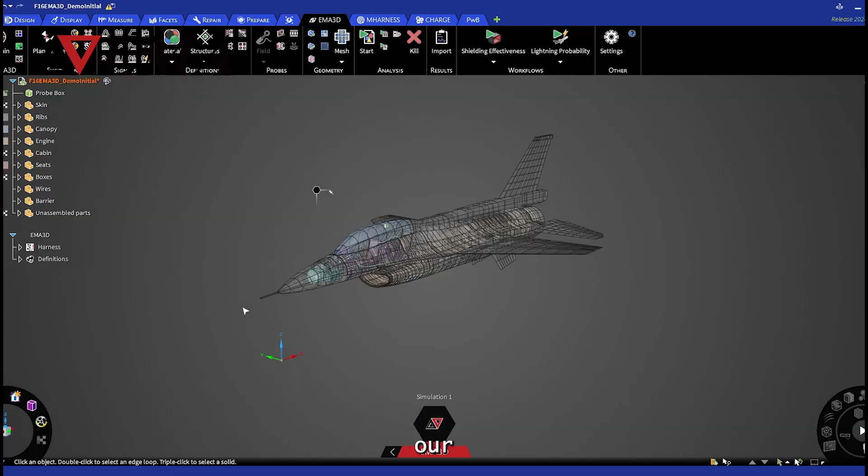People trust EMA to help them get it right the first time because we're really the only company in the industry that blends advanced simulation tools that we develop and use, consulting expertise and measurement expertise. And our brand is that we can come in and we have a wealth of expertise and tools at our disposal to troubleshoot EMI problems, to help you design better.

Where do you shield? How do you bond? How do you design a platform to meet the end use requirements of whatever environment it's going to be in?

Simulation and test have very different value propositions at different parts of the program. Before you build something, you're building CAD, you're doing digital design work anyways, and in lots of other industries and lots of other parts of aerospace and defense, simulation is commonplace. They use it for fluid flow, they use it for structures, for aerodynamics, for strain, and for fatigue. And really, we've been the pioneers of using it for electromagnetic effects.

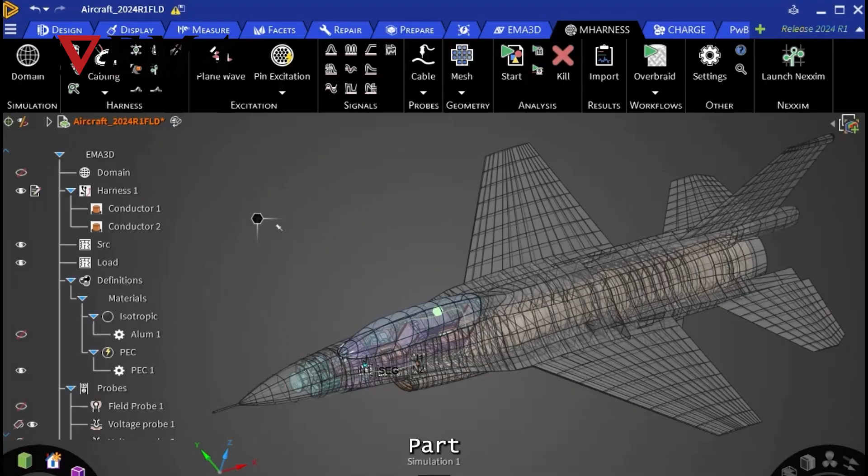It's just really complicated. Part of the reason that we've developed all the technology behind EMC Plus and Charge Plus is because as consultants, we needed those tools. So we've made them such that they can solve the problems that we as consultants need to solve.

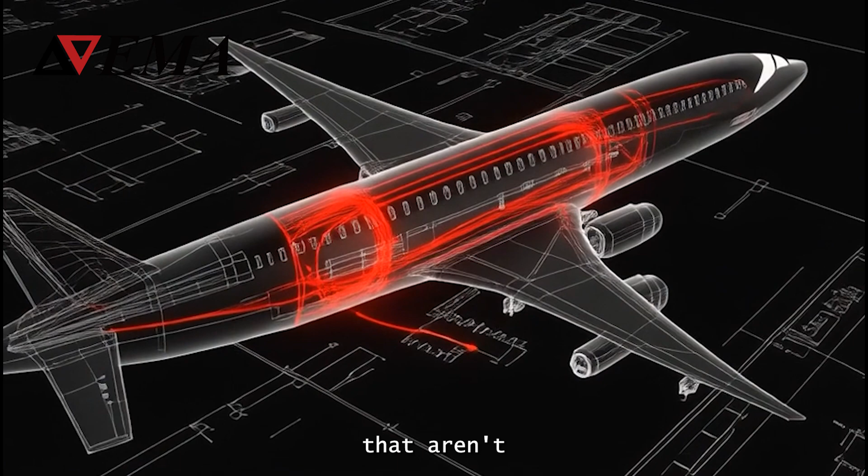You can figure out what knobs to turn very early in a program because that lets you avoid really easy mistakes that you don't need to make. Things like routing, bonding, grounding, you're saving money by not testing things that aren't likely to pass. You can rule out so many easy problems at their root before you get too far into a program. And testing then becomes a demonstration, right?

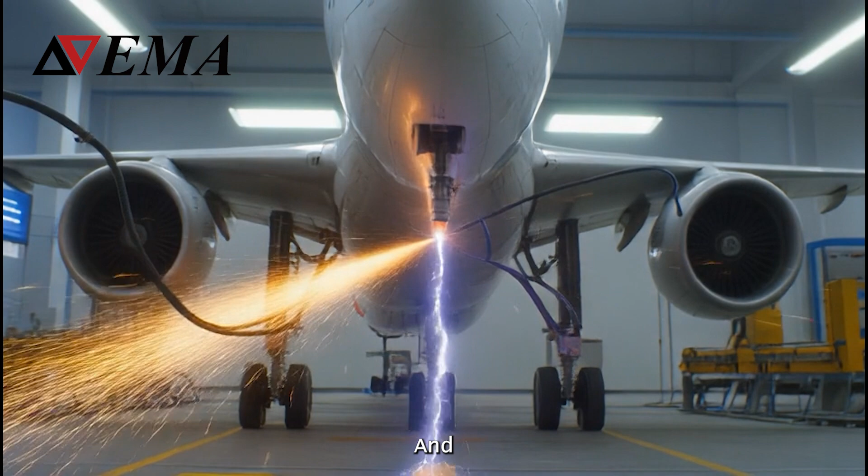So if you are hoping to pass a test, you haven't done an appropriate amount of engineering work to get there. And if you haven't been using advanced simulation there, you carry a lot of risk into these tests. And that risk can kill a company, it can kill a project, it can set you back months or years depending on the types of problems that you're in.

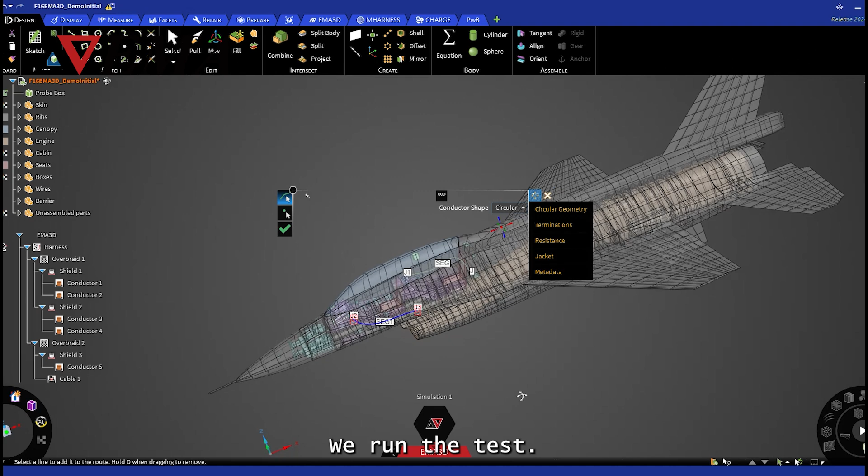So we specialize in deploying simulation early and often because we know the problems that you're going to run into. We know how you're going to have to demonstrate it. We know how to run the tests. We run the tests. And that makes us really good simulation engineers. And likewise, we do as much risk reduction as we can.

Unfortunately, a lot of the standards still require you to test, which means you need to go build something, you need to procure it. Test articles aren't cheap, especially on like a military program where the materials can be hundreds of thousands of dollars for a simple test. You want to make sure you test it right. And a lot of the standards talk about the right ways to do things, but there's always room for interpretation.

And our stance on testing it the way that it's going to be installed on the platform sounds simple, but it's not. You have to take samples or sections of airplanes and fuel tanks and fasteners and test them in a manner that, one, doesn't take 7 or 8 months to complete a test, but two, meets the intent of the requirement. And we're able to do that by blending both sim and test together really effectively.